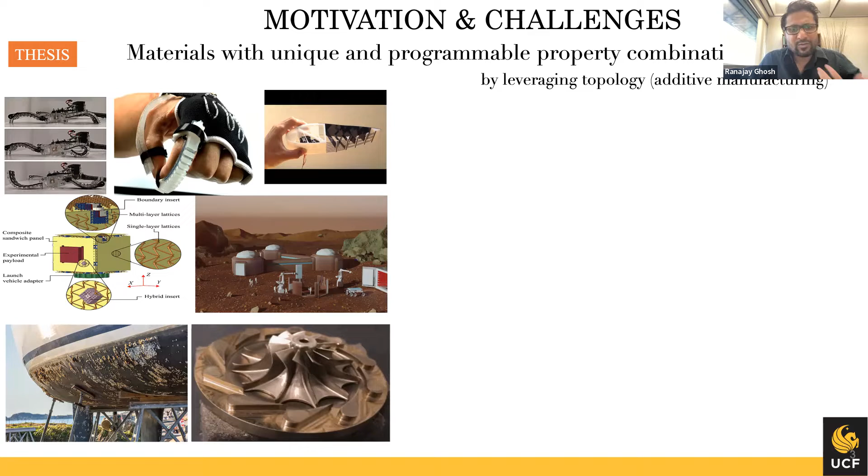So essentially what we are talking about is leveraging topology, which is a code word for additive manufacturing or advanced manufacturing. So for example, we are looking at surfaces which could be architectured, almost like scales on a fish or snake, and then use that to get plates and shells and filaments that can have programmable properties, which could be programmed in through 3D printing. And that could be used to tailor the performance of these structures, the stiffness of these structures, depending on individual humans or patients, or what the robot wants to do.

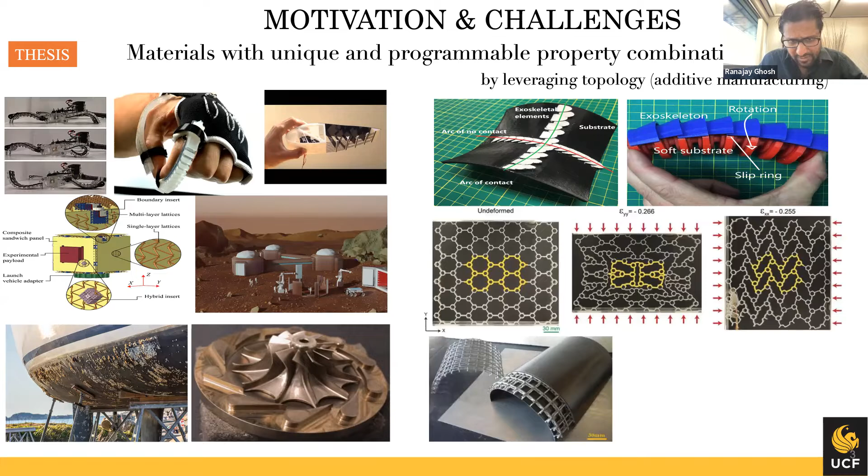And similarly, if you want to design lightweight cores for the satellite that I showed, we are looking into these network of structures. For example, this one has a negative Poisson's ratio. So if there are any expansion forces, for example, thermal expansion, etc., the negative Poisson ratio will lead to high tolerances. Okay, so high thermal tolerances. So you can test these in the lab, you can sandwich them and create these lattice core structures, which could find applications potentially to the various lightweight material applications.

Similarly, we also work on actually developing very sophisticated models to kind of understand the behavior. For example, this is actually a stress corrosion model where we try to understand how failure can happen due to corrosion. So more on this later.

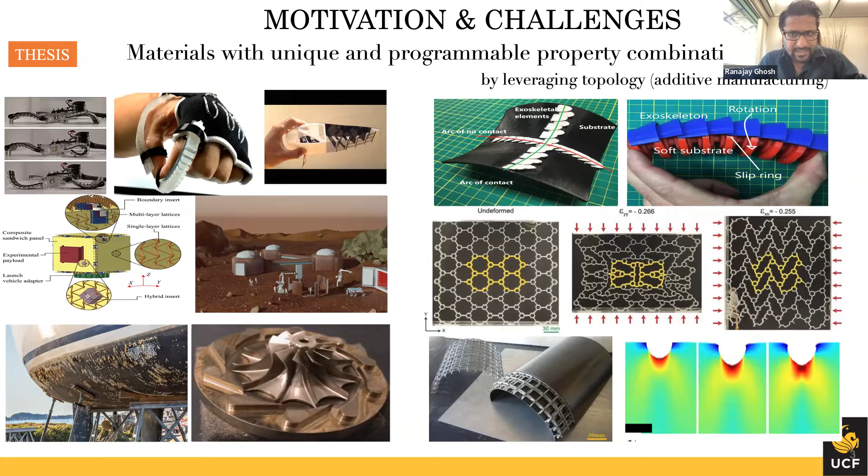But before I go any further, I would like to say, what is this fundamental challenge? This looks quite good. So if we can leverage topology, we should be able to solve these problems. So what is the state of the art right now? So the state of the art is still, we have a lot of ground to cover, and it is not easy. Success is not inevitable. And the reason for that is, visually, I would like to give you a certain kind of a visual landscape of the challenges.

So first challenge is, since we are dealing with materials and the topology, the design space is actually vast. This is what we call the combinatorial design space. That is, as you increase the number of variables, there are multiple ways in which they can come together along with the loads and give you a possible configuration space which you cannot traverse that easily. So it needs automation right there. Okay, so that's the first big challenge, whether you use analytical modeling or machine learning or any other technique. So this is the first insurmountable barrier.

Second one is you cannot use purely testing based strategy because the cost actually also increases exponentially. So the capital L, as you see on the screen, is the part length, and small l is the feature length. So the more intricate the structure is, the parts costs are very, very large. So you cannot actually just go ahead and build many structures and do your testing. So that's not feasible either.

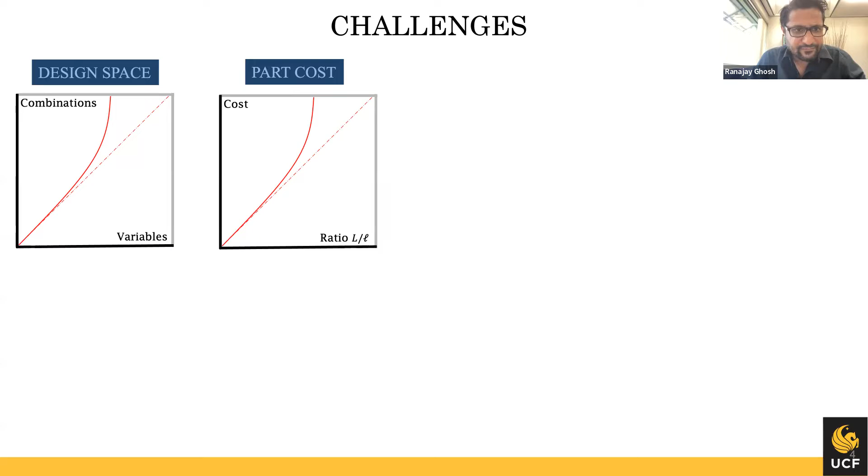Your computation. So if you take more and more unit cells, which are the repeating units of these structures, even the computing runtime is very huge. So even naive direct numerical simulation is not going to work beyond a few unit cells. Similarly, what about models? If you do use linear models, very quickly, as the loads increase, your errors are going to go out of control.

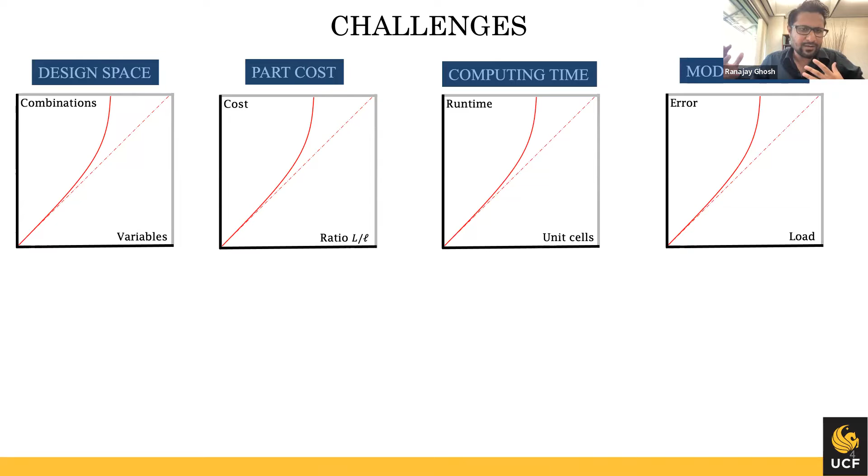So we are now facing a kind of a challenge from all sides. So we need a strategy that can flatten this curve, these insurmountable barriers. And that is a central challenge, if you ask me, of this field: how to take care of all four of these and move forward.

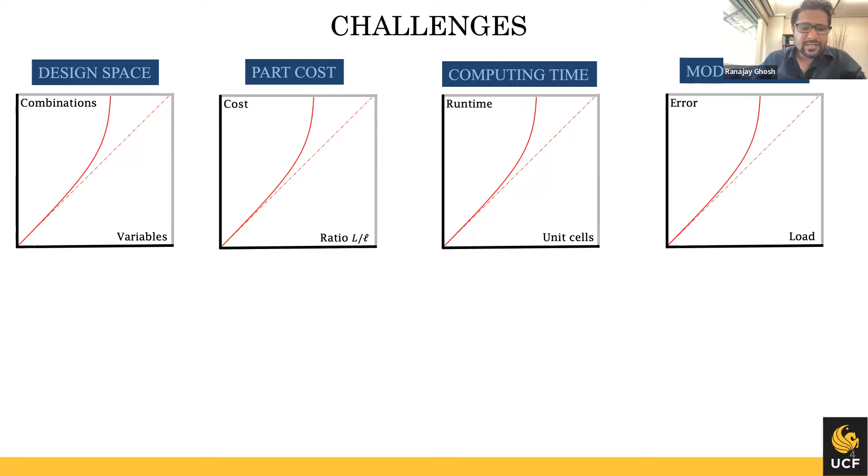So essentially, whenever we do a processing of a conventional material, we have the process that leads to a structure, a structural length, and then you make a component out of it, and you get the response. So typically, the microstructure is at a very different length scale than the length scale of the system. So, for example, if you are making an aluminum beam, then the microstructure is the length of its grain boundaries. So it's micrometers to say a meter. So it's a very well separated length scale. And so a lot of averaging that we learn in strength of materials, mechanical engineering, aerospace engineering, civil engineering, all of that works.

But when we bring in the architecture, when we bring in an intermediate length scale, this process expands. And now you have a process that leads to a structure. That structure, for example, a filament of a 3D printer, or the resin that will give you a 3D printed structure. So that base material has its own structure. You make it undergo another process, say 3D printing, to give you the architecture, and then there is a response. So now you have three length scales, where the original one may be very small, but now you have an intermediate length scale, which is only barely less than the part length scale.

So that actually, it turns out, complicates our problem quite a bit. So now the overall response is not coming from the microstructure, but from the mesostructure. So that is actually a very big problem, and also an opportunity. So developing models that connect process, architecture, and response is the key. So that's basically what we will try to do.

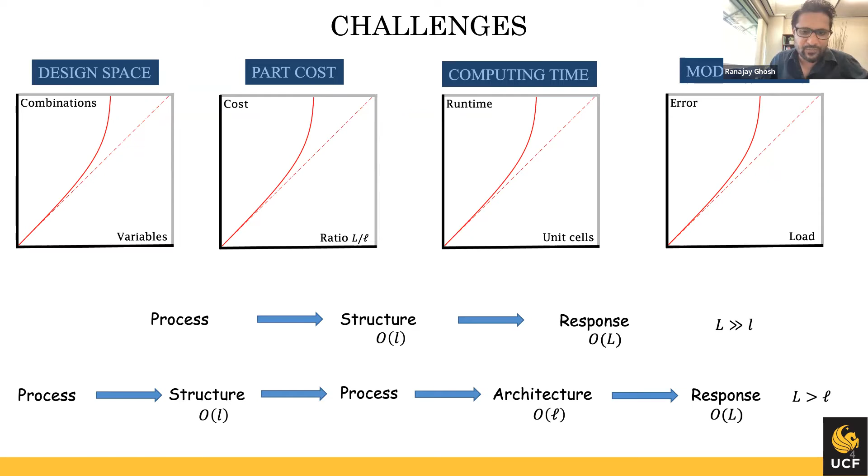So some of the projects which I have targeted. The first project I want to talk about is actually programmable architecture on the external side. A lot of metamaterials, which are basically materials which have a meta structure to them, are actually bulk in nature. It's throughout the third dimension.

But very little attention has been paid to architecture on the surface, and this fact actually has been acknowledged by the fluids community, by the interfacial community, by the chemical community who does catalysis and things like that. The surfaces do have a role. Typically, in mechanics and structures, we haven't paid that much attention yet. So my research is actually to look into the effect of architecture on the surface.

So my 2 NSF grants, about $800,000 on this, are to actually understand the role of these surface architectures in changing the mechanical property. We have discovered nonlinear architecture property relationships. We think that the variable stiffnesses that we get from these could be used in smart wearable skins, tunable stiffness structures for aerospace applications, for soft robotics. So we are just finishing up more on the sciencey side and moving more to the application side.

So the approach that we use is a combination approach. We use multi-scale modeling, nonlinear finite elements, nonlinear elasticity, and then we have our own lab setup where we do tests to see how far we are off from the low displacement behavior, from emergent properties, that is, properties that were not there in the constituents, either the scales themselves or the membranes. They themselves do not possess the kind of properties that together they would possess. So we characterize them, we identify them.

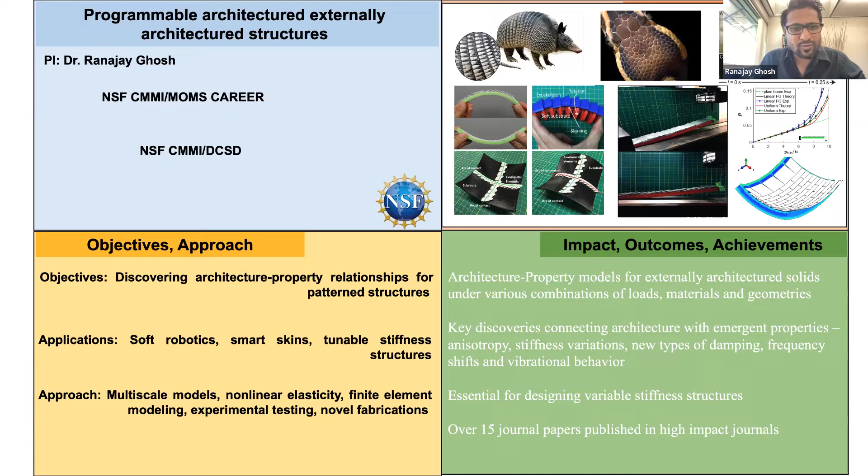Another project that I want to talk about is with my former colleague, Andrew Dickerson. Here we again look at patterned surfaces, but the surfaces are inspired from the fur of animals. We want to see, if a particulate flow goes through it, can we arrest fouling? We have found that there are natural animals that don't get fouled that easily. So why is that? Our hypothesis is that it's the fluid structure interaction at multiple length scales that prevents this particle entrapment.

Our experiments and some of our simple singular fiber models are converging now, and they're showing an intricate link between how the fibers deform, how the deposition takes place and how the fluid gets contoured. We believe that this will lead to more anti-fouling surfaces, or we can pinpoint what causes the fouling to be more or less, so that we can either design filters or design anti-fouling surfaces, and we can optimize those kinds of surfaces.

So this is work still in progress. The project will end soon, and we are still writing up papers on this, but we believe there is a lot of scope here to produce these surfaces, or to look at different kinds of fur mimics, different kinds of nanowires, or fibers or fabrics that could do something similar. So this is the NSF project I'm talking about.

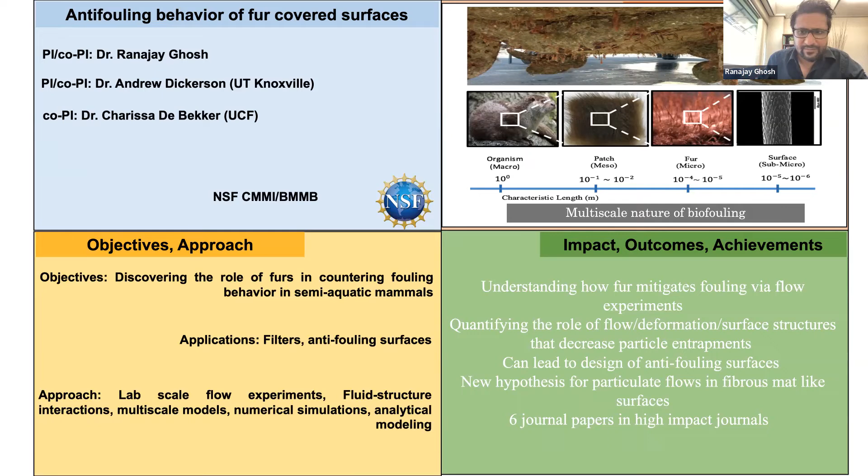In view of time, I will quickly move to the other project that we have, and this was a DARPA project with co-PI Dr. Raghavan. And here we are actually looking at stress corrosion cracking.

That is, what could we do? What kind of coating or what kind of treatment can actually prevent stress corrosion from initiating? So we were actually interested in the very, very beginning stages of stress corrosion. Now, stress corrosion is a highly multi-physical coupled mechanochemical process. So our approach is actually to design thermodynamically consistent models that can help us pinpoint, along with experiments, what causes

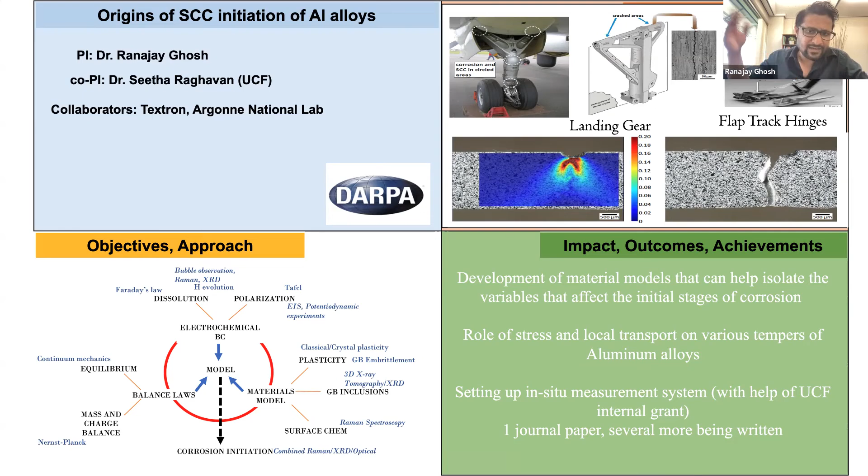what aspect of corrosion. So this is a formidable challenge, and we have written one paper up, and we're now up for more results, and I will be happy to talk to people who would be interested in this work. So this is another project that we have, which is a modeling experimental approach to stress corrosion cracking. We are grateful to UCF for supporting some of the aspects of this project. We got an internal grant to set up a very sophisticated micro scale in situ experiment that can tell us exactly the kinetics of corrosion and the various factors that lead to corrosion.

So the last project is not yet funded, but we are still working. I'm very excited about this project, and I hope I get some interest from the space community. It is using metamaterials to work on austere environments, for example, extraterrestrial binder jet additive manufacturing. And here I'm being helped by students of Dr. Raghavan, Dr. Kapat, Dr. Seal, and definitely acknowledgement to the Exolith lab, Dr. Dan Britt.

And what we did, we just submitted our first work, is to use some very simple binders, for example, salt or brine binders, which we could find in extraterrestrial environments, and see if we can come up with 3D printing processes that make it possible. So here we have used salt binder, we have done 3D digital image correlations, and we are trying to develop material models that can tell us how much strength the material has. And what we found out is that with a simple brine solution you can get pretty reasonable strength. So you can actually use this for very intricate parts.

So the next step would be to actually design these 3D printers that can do it. And we had undergraduate students, thanks to Kurt Stresau's help, who were designing these Exolith 3D printers. So if we can make this, it will be pretty revolutionary. It's not meant to compete with building materials as such, but for any functional parts, if you could make them using regolith.

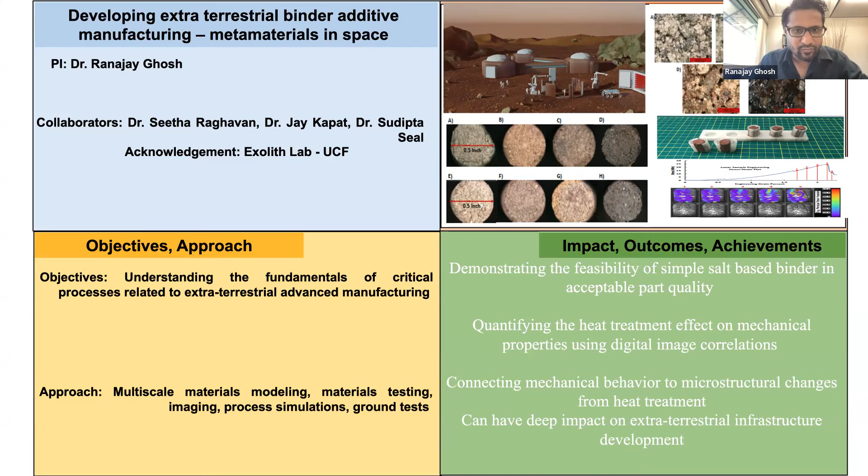So looking to the future, there are two areas in which I'm focusing. One is energy, for example, materials for hydrogen economy or decarbonization. So corrosion work directly leads to that; hydrogen embrittlement is very important there. So I'm trying to deepen my understanding of hydrogen embrittlement. That would allow me to design the kind of material structure combinations that could help us in mitigating corrosion. So that's one aspect that I'm working on.

I'm also working on reducing weight of materials, giving more multifunctionality to these materials for new types of aerospace applications, handling, transportation, and things like that. So that adds to soft lightweight autonomous materials. So that's one focus area. I have already worked with MSE people, professors from chemistry or the nanocenter, formally or informally, on these projects. I would like to expand my collaboration.

Another thing is I'm focusing on space. So for example, manufacturing in austere environments: can metamaterials help us tide over some of the challenges that we have in these environments? For that, we need to master the 3D printing process under extraterrestrial environments. So that's ground testing, process optimization, predictions. We are developing models for that. This is more of a nascent project. We are still looking to expand. And obviously, we are looking at lightweight robotics for space applications or planetary environments.

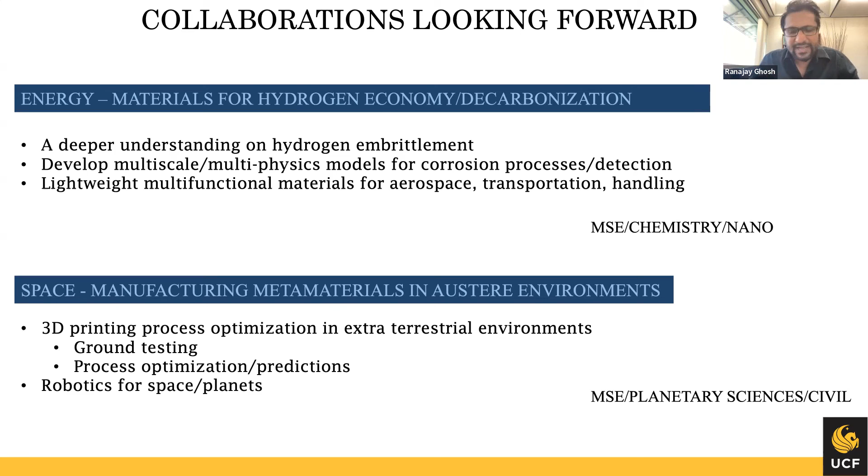I would love to work with people in material science, planetary science, civil engineering. Again, this is not an exhaustive list. It's people with whom I've already interacted for these projects. I'm very happy to collaborate with people across disciplines. So thank you very much.

I would like to acknowledge NSF, Department of Energy, Siemens, who has worked on multiple projects, on the robotics project, on 3D printing projects. Some of them were the inspiration for other projects that I have done. DARPA, obviously, and my existing collaborators, Seetha, Jay, Andrew, and of late Sudipta. So thank you very much. I will be happy to take any questions.